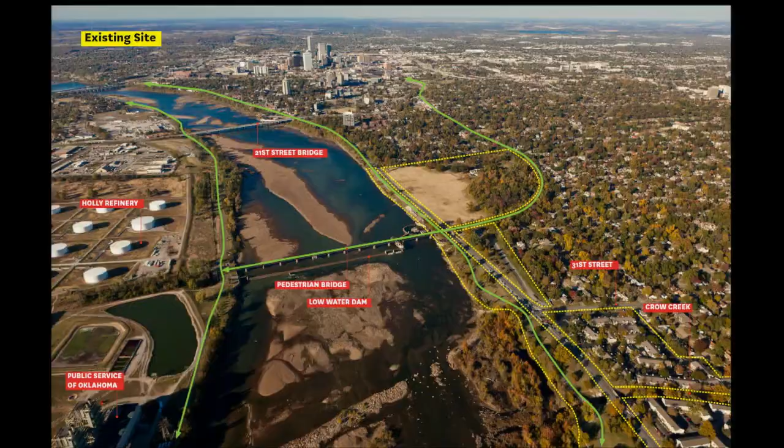But the site was made up of 4 different parcels divided by a major commuter route to downtown called Riverside Drive. Obviously, it had a lot going for it in terms of its presence on the river, but it also had these series of bike and pedestrian trails, which are noted in green. They run up and down both sides of the bank, and also connect straight through some of the neighborhoods and provide you access to downtown. So one of the biggest assets was how connected the site was to the adjacent neighborhoods.

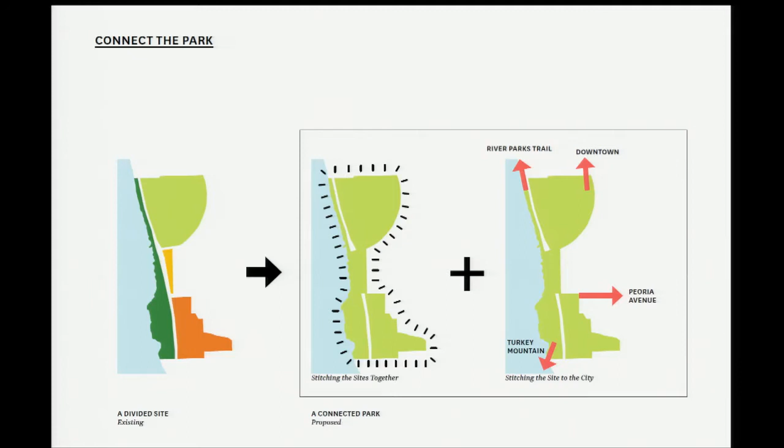So out of the competition phase, there were a couple of key components that came out of that, or a couple of main ideas. Obviously, with the ambitions of this foundation in creating some place for people to come together, you needed to match those ambitions with a much larger site than 4 different pieces. And so the main idea was really to try to connect these different parts and make it feel like it was a continuous park space, so that when you're moving from one space to the next, you didn't ever feel like you were leaving the site.

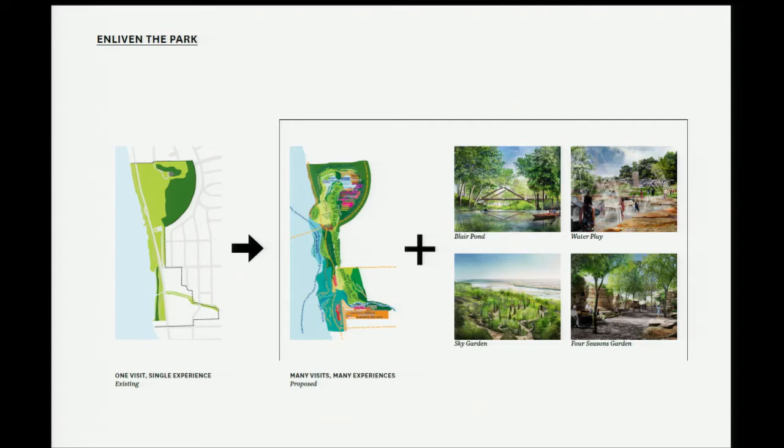The next one, Tulsa's a pretty comfortable place. Everybody has their own gardens, their own backyard space, a lot of generosity in terms of space and just a level of calmness. And so one of the things that became fairly obvious with visiting the city a few times, speaking with the client group and some stakeholders, was that this really needed to be something special to pull people out of their own backyards and get them actually wanting to spend time with their neighbor, right? Like, I don't know about other Midwestern cities, but they like their space, they like being alone. And this was a real effort to try to bring the community together.

We had a whole series of public engagement sessions to try to really understand if the key concepts that were developed during the master plan phase, where we actually didn't have the privilege to engage with the public, still held true. And so we had some meetings around different models. We went to different neighborhoods throughout the city, spoke one-on-one, set up a project website, and everybody was able to submit feedback that way. And we took all of that feedback and tried to categorize it into a series of larger categories, some related to program types, some related to existing site elements and some of the issues that were present then.

And then out of that came a series of design principles. So for the master plan, we'll focus on just the top 3, which is creating that level of diversity that I hit on, the variety of activities, and making sure that the site was connected both internally but also on a much more neighborhood scale.

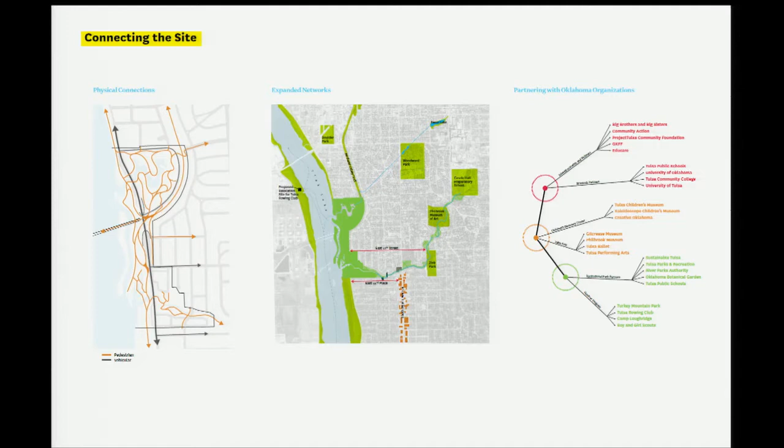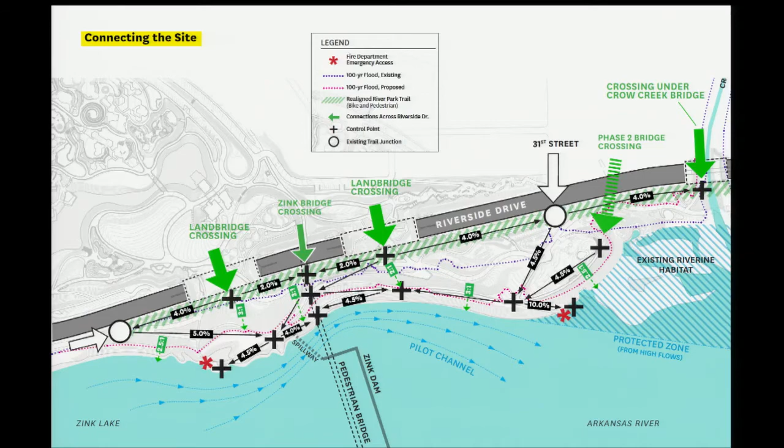So connecting the site. The whole site from north to south is almost a mile. It's about 4,800 feet. And so we knew that there needed to be a whole series of different types of connections, some over the roadway, some at grade that would connect back to the neighborhoods, and some actually under the roadway. And so in certain instances, we brought soil up and over the roadway, like this image.

These are two what we call land bridges, where the park space literally spills from one side of the park over into the waterfront. They're built on a whole precast concrete system, and then we custom made the ends so that it felt much more integrated into the land. This also shows how we provided some lower trails at the water's edge and helped that whole river's edge become much more accessible than it was.

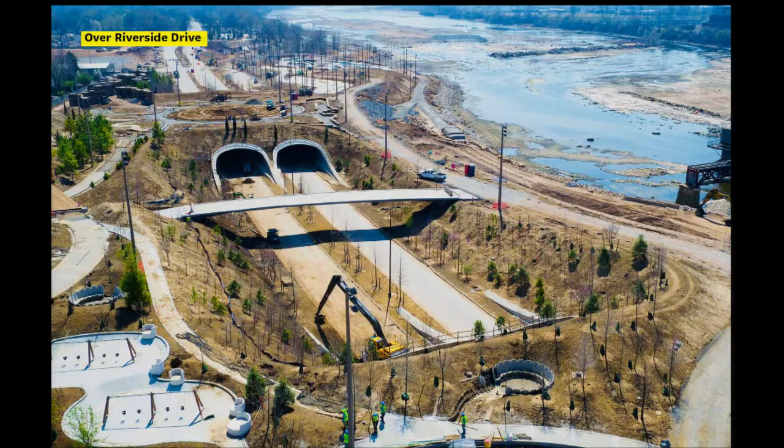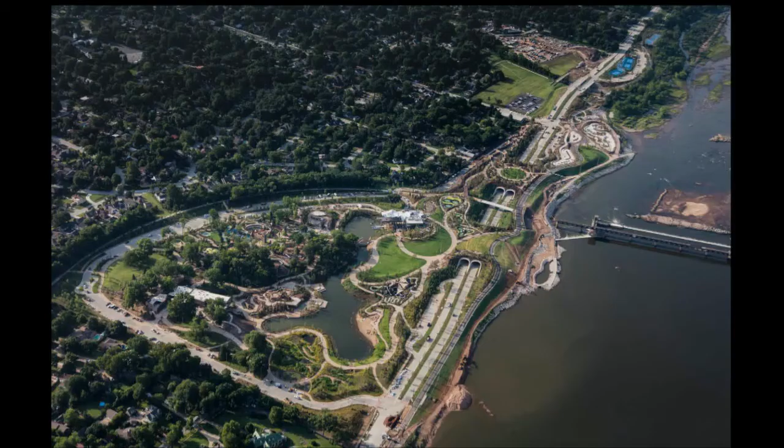When that was originally permitted with the Army Corps, the Parks Department was required to remove a certain amount of sediment on an annual basis, and they didn't have the budget over the last 10 plus years to do so, so it kept building up. So it just so happened that gradation of that material met our engineering requirements. So we basically took about 300,000 cubic yards out of the river, so we helped them with their maintenance issues and used that as the subgrade material to build the park.

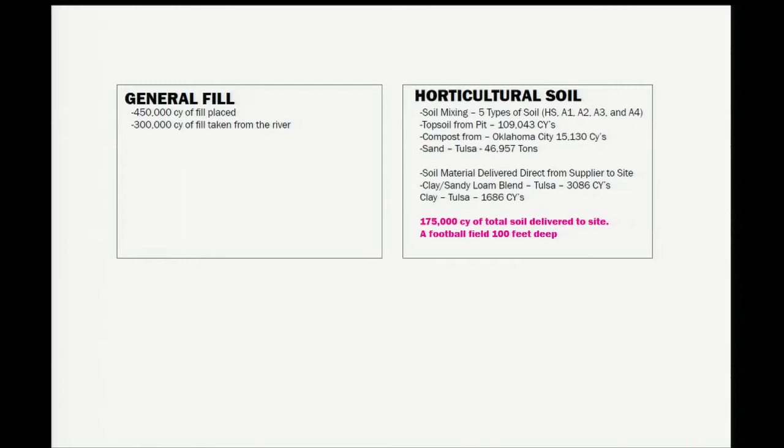Just kind of some fun facts that Matt put together in terms of not only the general fill, but what it took to make those different horticultural soil profiles. So to date, the park has received about 1.5 million visitors, and it's only been open since September. And so I think part of our job is to try to anticipate how that visitorship would impact the park and develop soil profiles that not only sustain that level of traffic, but also help support the vision of plant diversity and how things can sustain themselves without too much management.

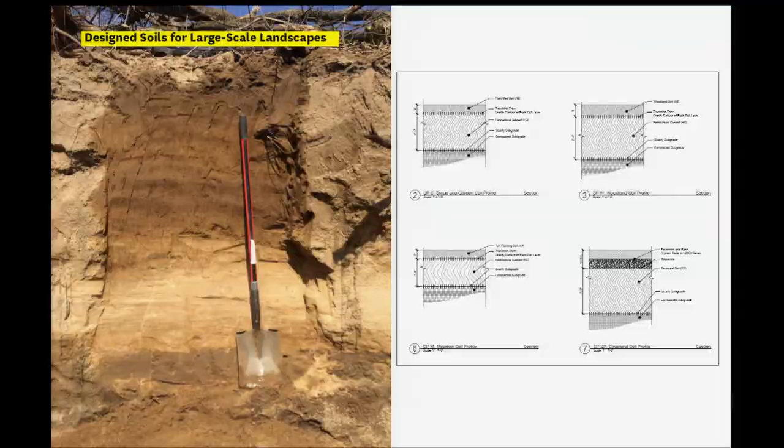Yeah, so if you look at the soil profile, one of our biggest components of our contract was the soil installation. About 25% of our total contract was soil installation. So we had to import about 200,000 cubic yards of soil for the job. And trying to do that with a consistent profile to meet our quality requirements was quite a challenge.

So this is just a good example. You're gonna see some pictures in a minute of where we mined the soil. But that top 3 foot is basically a sandy loam soil. We've got a couple feet of what we call sugar sand, and then we get into the clay. Well, we didn't want much of the clay, so once we hit the clay, we had to kind of stop digging and move to a different spot.

Well, the challenge is over thousands, millions of years, those soil profiles are different everywhere. So it was quite a challenge to get consistent soil requirements with the varying levels of soil profiles that we were digging through. So that was one of our biggest challenges. You'll see on the next page, we've got the mining operation.

So we had a 15-acre site off-site. It was about 20 minutes northwest of the site. And we were hoping we could just dig down 20 feet, pull all the soil together, combine it, mix it up, and send it to the site. Well, it didn't work like that.

The first kind of foot was all organics, lots of roots, lots of just stuff we didn't need at the job. So they hauled that off, sold it to somebody else. We took the next little bit, and as you can see, we're benching right there. We're mining about 6 foot over about 15 acres. And we did this over about a 1.5 to 2 year period of time.

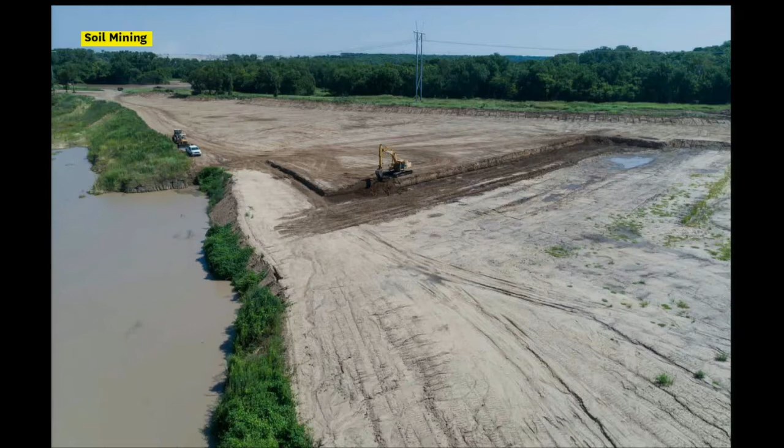But again, it varied. You can't really tell because our operator would come back and smooth it out, but it varied. Some spots we'd be 8 feet deep, some spots we'd be 3 foot deep. And it was all dependent on the soil that was brought in. This is our mixing yard. So the mining pit was just past those trees that way.

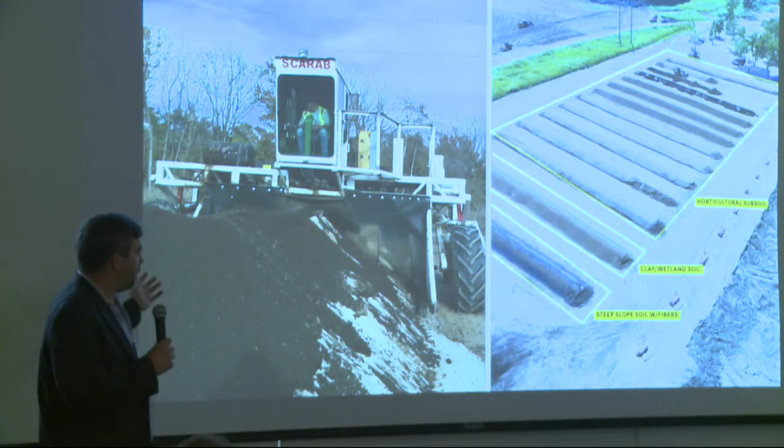This is a scarab. This is a big, gnarly looking machine. This is a compost turner, basically, is what it amounts to. And it has just huge tillers underneath there. And what we would do is, based on the soil requirements, we'd combine sand, sandy loam, a little bit of clay, add compost as we needed. We had 5 different soil mixes, either a 2-to-1 with kind of sand and compost, a 3-to-1, 4-to-1, just kind of depends on the areas.

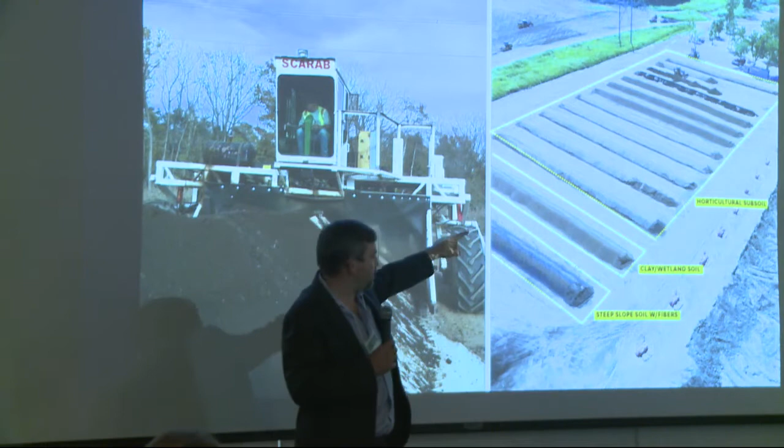But you can see the mixing yard. The horticultural subsoil, I think, was about 150,000 of our 180,000. That was the largest percentage of our soil. The clay wetland soil is a heavier clay. We used a special mix for that. And then on the steep slopes, we'll talk about slopes in just a second, but we put fibers in there.

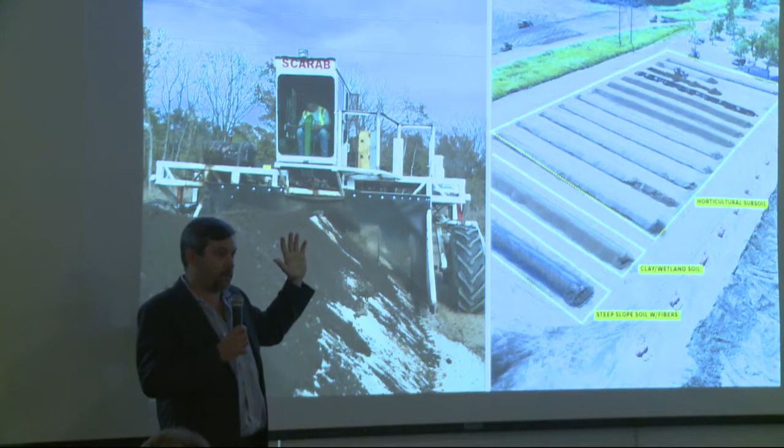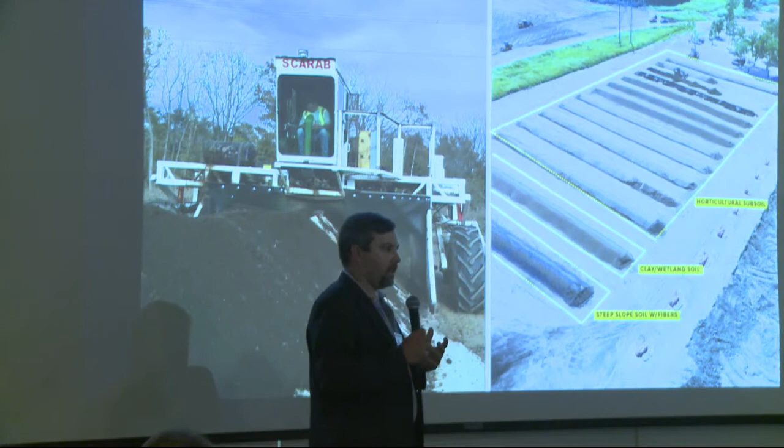This is probably a question half of y'all won't know, but does everybody here know what a cassette tape is? Yes? No? All right. Well, the fibers in the soil is basically, if you pulled all the roll out of the cassette tape, it's similar to that. And what it does is help hold the soil on the slope. So we'll look at some installation techniques we're using.

So each component, which was sandy loam, sand, clay, compost, and a few others, each got their own individual test, and we did rounds and rounds of testing to try to find the best sandy loam. We went south, we went all over Tulsa, and we were considering shipping it in from hours away to get the right kind. Finally found one that worked.

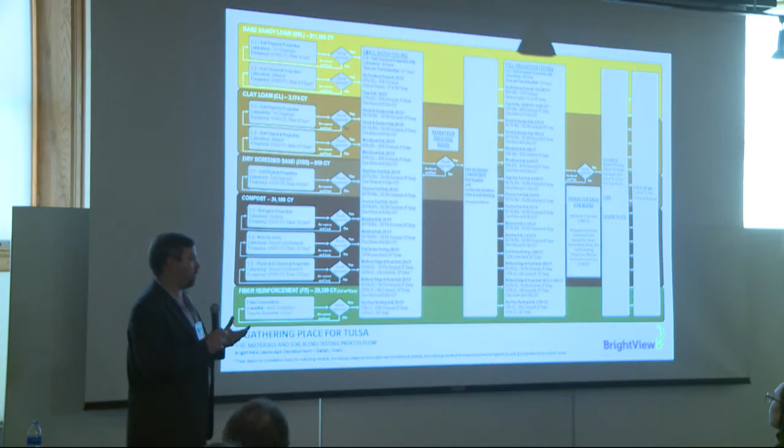Then we had to start combining those into the mixes that we needed to, and we had to do small batch testing. So the first small batch was 20 yards. We'd mix it up and test it, make sure we got it right. Then we'd move to 250 yards, and at the end of the job, we were just testing every 1,000 yards.

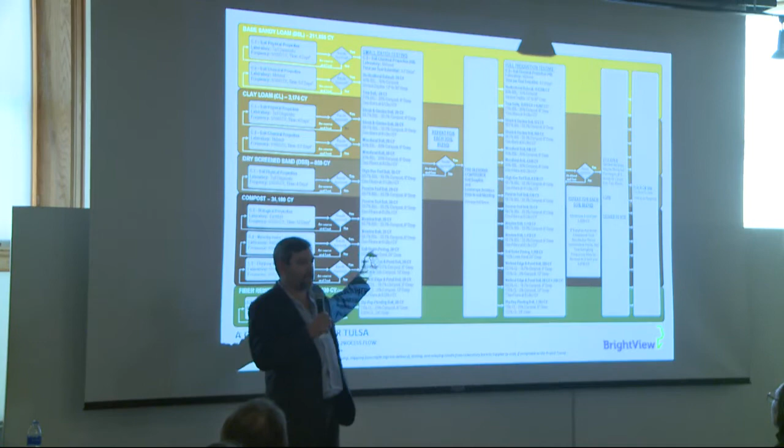But on 175,000 yards at multiple components, multiple tests, I mean, it was a lot of money to test the soil. And then we had to test it again when it got to the job just to make sure that we had stayed consistent with the product all the way through. So the soil was a huge piece and very important part of our project, and so we just wanted to make sure we got that right. We felt like as a team, if we don't get the base layer right, we're not going to get the rest of it right. So it was a big focus for us.

Next picture, this is the wetland areas, and we'll see some more pictures of this in a minute. But as you can see, there's some aggregate in there, and we're placing soil as we go. It's got some of the stone weirs and some different areas. So it was just a tricky installation.

And this was also the very first piece we did. So the wetlands were installed probably not quite 2 years, a year and a half ahead of the rest of the project, just because when you got this big of a project, you kind of got to go with what you can.

So you can see we laid down some filter fabric in some areas, just in the wetlands, and put some soil on top of that and plants. You'll see a little bit more of that in a minute.

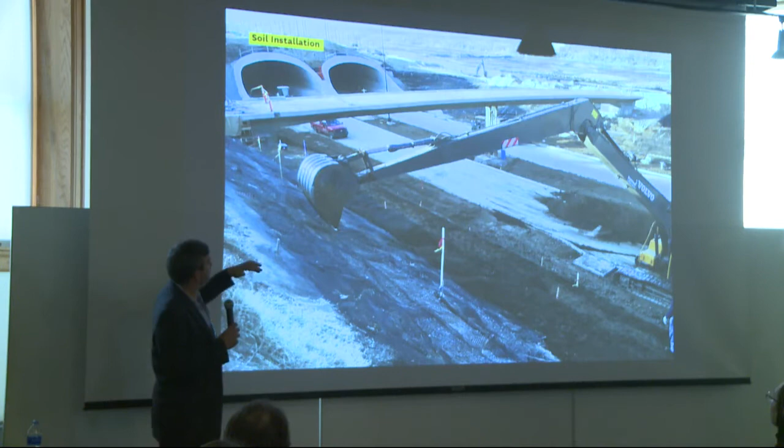But hands down, the trickiest part of the job was the fill you saw in blue on that previous page Chris showed. The fill was very tricky because of the slopes. You can't really get a gauge, but our guys had to sit on their butt and crab crawl down the slopes to make sure we didn't trip and fall. They were that steep. Aesthetically it looked great, but our challenge was how do we place that soil?

So we bought a $100,000 long reach excavator with about a 3/4 yard bucket. We had 175,000 yards total, and we didn't place all of it just with that machine, but we placed a lot of yardage with it. It was running nonstop.

If you look at the detail there, somebody brought up compaction earlier in a previous discussion. One issue is we could compact the heck out of it, but that's not what we want. We determined that per the specs, and we didn't drive any machines on any of the dirt. Or soil, we don't have dirt.

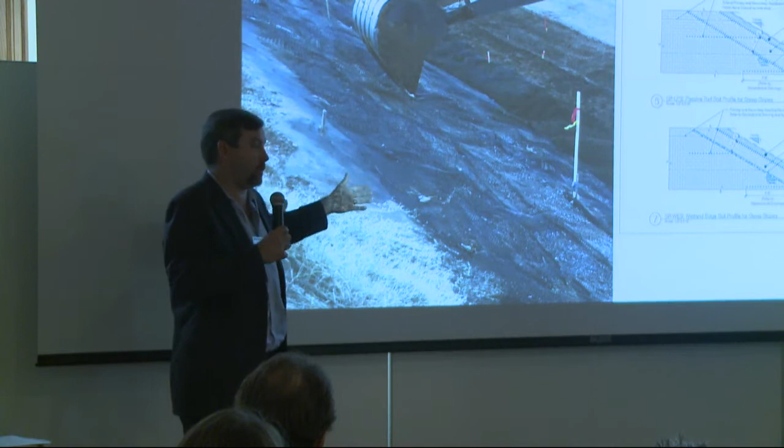So we didn't drive any machines on the soil, and that was a challenge in areas hard to get to. We had to work backwards out of a lot of areas. The challenge was how do you get the soil to stay without sliding down the hill, because we would have the soil placed for months sometimes before we actually got the shrubs, trees, or grass seed mixes held most of these slopes, which you'll see in a minute in some other pictures.

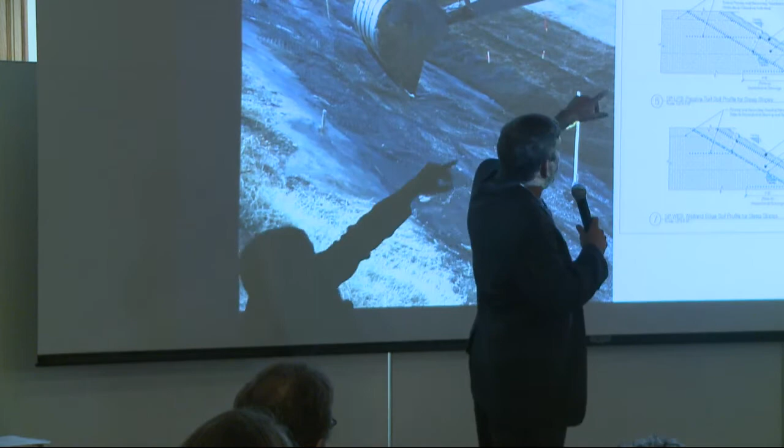But the geogrid layers are really what held it. If you look at the red lines, what we would do is place the soil, then the geogrid would be held up, and we'd lay the geogrid down on top of it, place another layer of soil going up the slope, and place the geogrid down on top of it again. So the geogrid had to go in layers, and that was a very slow, meticulous, tricky part of this process. Just the soil placement without compacting the slopes, and doing it safely, was very important.

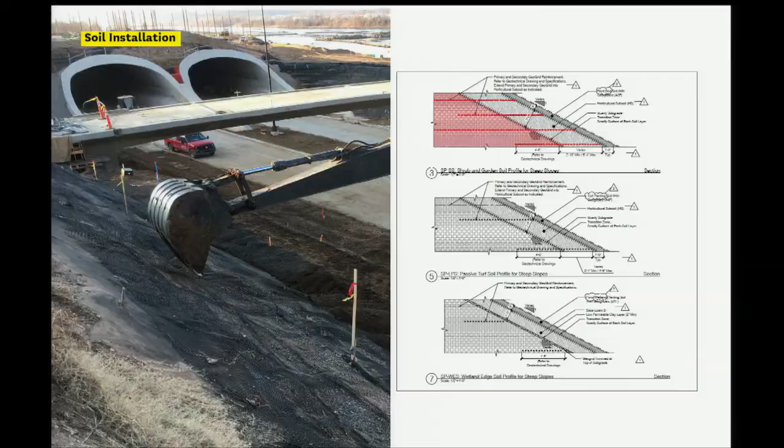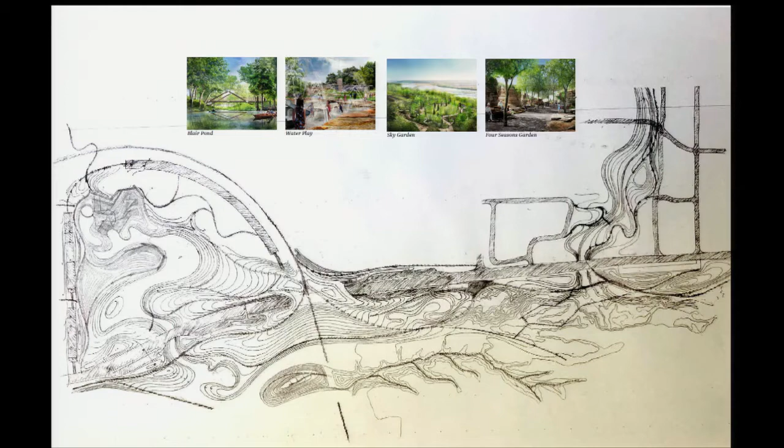One of the things I mentioned earlier was this idea of diversity of program, supported by all the public input. Honestly, with all of this wish list generated from the public input sessions, we could have used a site twice the size to accommodate everything. So it meant thinking about it differently and being a little more inventive about how to accommodate all of those different program pieces.

Obviously there was a tremendous amount of earthwork happening just to bring the land up and over the roadway. We carried that a little further in terms of how to accommodate so much program in a relatively small site. Most of that was done through topographic change, where you're really containing certain spaces, certain program elements that are next to each other but not necessarily complementary. That was a huge driver in the final form of the park.

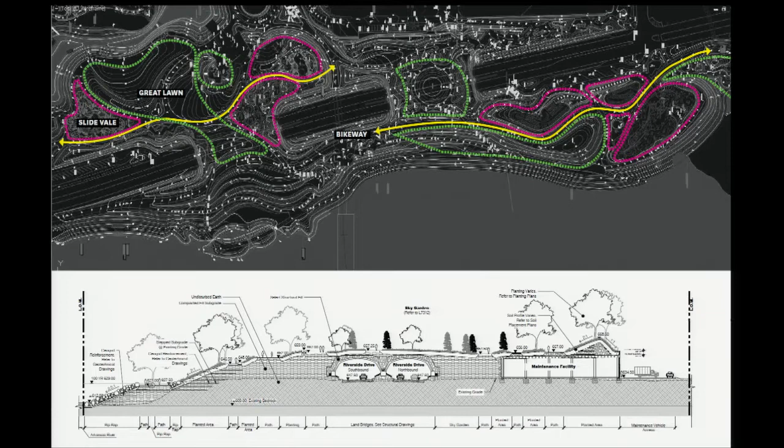This just shows two instances of that actually being carried out. On the left-hand side, there's a great lawn, the biggest lawn space in the park. You would think you'd want a quiet picnic space, but it's actually bounded by two playground spaces on either side. So you can imagine the level of noise coming out of those spaces when you're just trying to sit and relax and enjoy the view.

One of the strategies was to try to think about containing this, and in this instance, this whole space was sunken down. It helps not only visually, but acoustically. Honestly, this is about a 20-foot or so grade change, and 20 feet to a kid is just a mountain. So it doesn't take a lot, depending on who your audience is, for it to feel really impactful experientially.

And this is the great lawn next to it. The slide vale is actually just beyond this knoll here, and you can't see one from the other. So it's, I hope, successful.

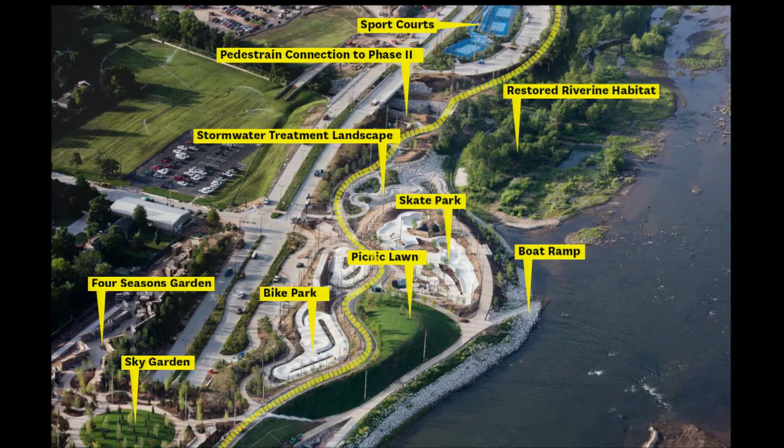I mentioned earlier that there's an existing bikeway that runs north-south through the park. We realigned that as part of this project, but one important thing was that this was such a heavily used trail—people go there after work to ride their bikes, go for a run—so it was our intent to preserve at least a little bit of that calmness and the views to the river.

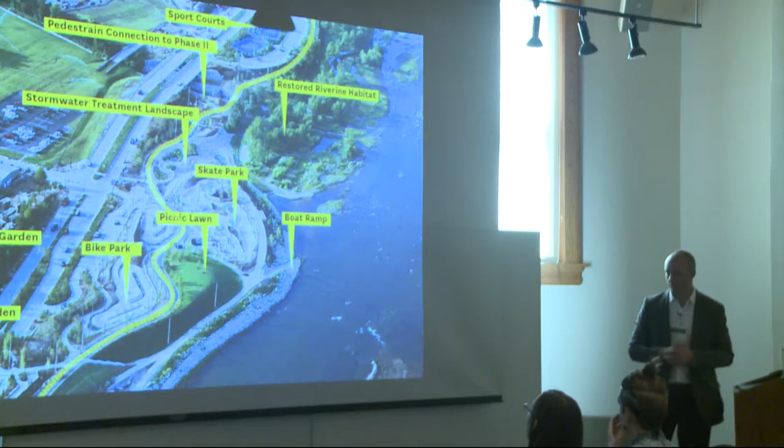Now you can see all the different program dotting alongside the path, but again, the same or similar strategy about trying to create some grade separation, whether through sunken spaces or raised berms, so you can actually experience it, you and the river, or you and a friend going for a run. These are the different types of spaces along that same route: the Sky Garden on the land bridge, the bike park, sport courts, stormwater management areas, and a mitigation area that we'll talk about in a bit.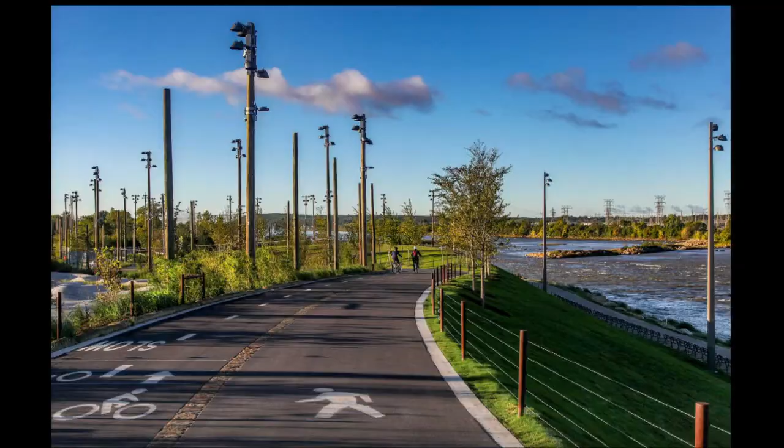This is just entering—you can see the bike park on the left. As those plants grow up, it will be almost completely screened, and it sort of reestablishes your relationship with the river.

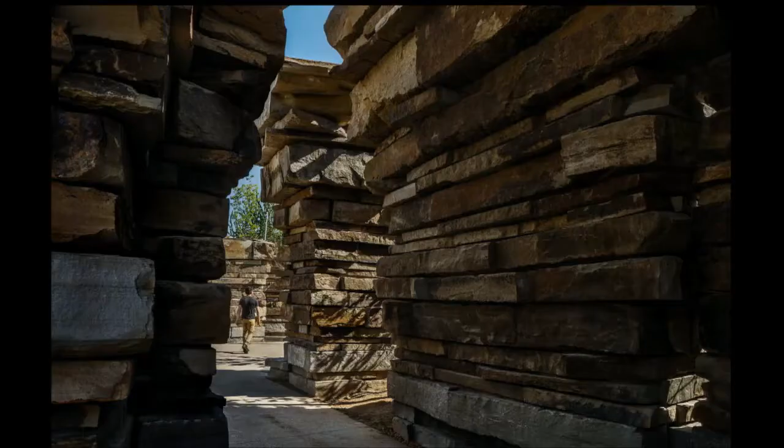Another big component is materials. If you remember that image of Chandler Park I showed earlier, it was a huge inspiration for this space in particular, known as the Four Seasons Garden—a name we came up with right before a public meeting, and once somebody starts calling it that, that's the end, even though there's nothing Four Seasons about it. Anyway, it was a fun process to take some of those inspirational places and figure out what the reinterpretation of that might be.

It started with visits to quarries, understanding their capacity not only for fabrication but to supply a job. There's something like 5,000 tons of stone just in this garden space, which is about 800 feet long. The idea is that the stone on the project isn't used in a typical way—it's used in a very unfamiliar, hopefully surprising way. It's not about ornamentation, but really about shaping spaces and your experience through the park.

So the slide hill that I showed you earlier is a means to get up to the top of the play space and also to stabilize the banks.

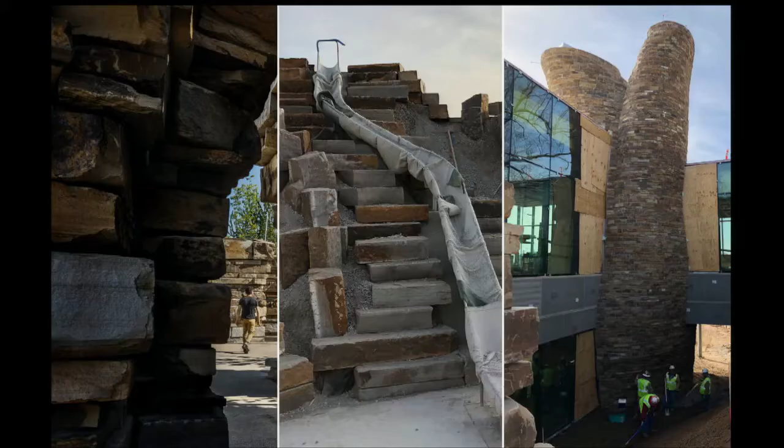This is a moment at the Lodge building. For those who don't know Mack Scogin and Merrill Elam's work, I'd recommend looking them up—they're possibly two of the best American architects alive, not to mention the sweetest people ever. People talk about wanting to integrate architecture and landscape, and I think they're a firm that really strives to do that, understanding how you move around and through a building, how you approach it, and what you're looking out from the building onto. They've been truly inspirational to work with.

Then you make your way out to the waterfront, and there are certain requirements you need to meet with the Army Corps of Engineers in terms of specified riprap sizes and materials that hold up to abrasion. But it shouldn't limit you in how that material gets used or the form it takes. This is a stormwater management area that takes some of the roadway runoff and filters it through a series of gardens and then out to the river—also the beginning of our mitigation area, which I'll talk about later.

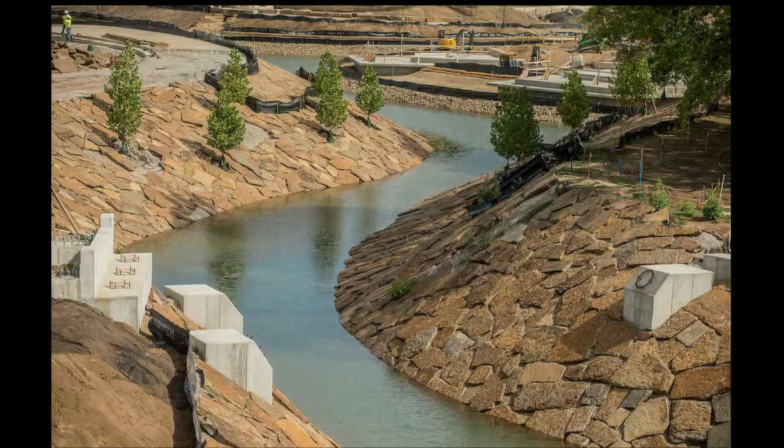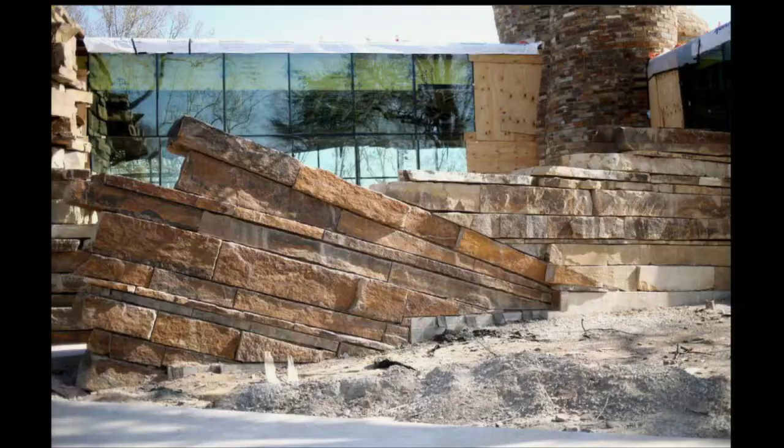Just more stone used to really shape your experience of the place. The pond water comes up quite a bit from here, but you can actually rent boats and canoes from the boathouse and paddle through, which is quite an experience. Going back to the use of stone in both the landscape and architecture, I think this is a good image representing a real integration of the two.

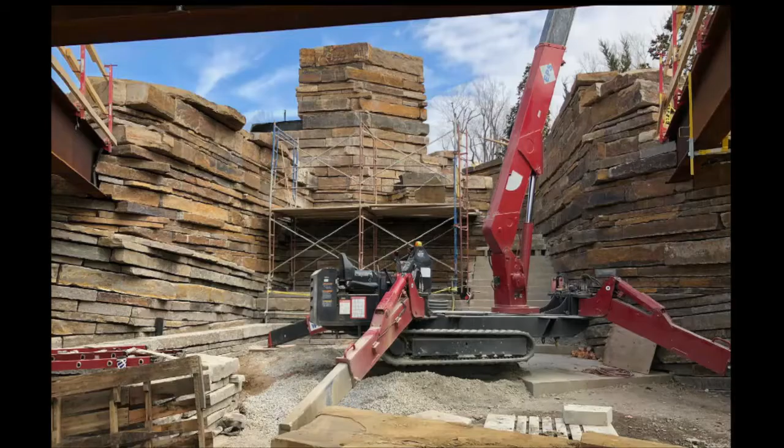And finally, one last stone image, just because this is one of my favorite spaces in the park. But again, this is not about stone as ornamentation, but stone as actually shaping your experience and feeling like you're carved down and in a space.

We actually built a lot of physical models and handed those to the contractor so that they could understand what we were looking for. The tendency with traditional masons is to try to do a really neat job, right? Align all the joints, align all the stone, and it sort of takes the life out of the walls and things. So we probably ripped portions of this down 4 and 5 times just to get those shadow lines and the break points on the corners, just to try to bring a little bit of life back to it.

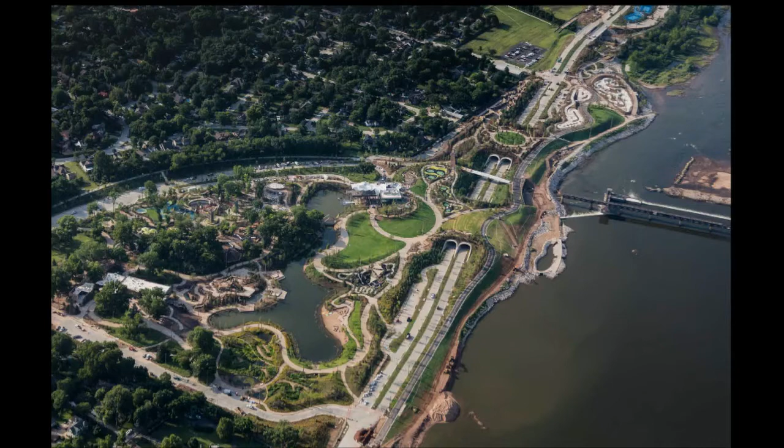As Mark mentioned, water is a huge component of many of our landscapes, and it was so at the gathering place. Not only the presence of the Arkansas River, but it served as a launching point for our strategy on how to deal with the Blair site, which is this one on the lower left.

So the initial concept was to try to create a much more inwardly focused landscape on that piece of land and have the waterfront landscape be much more about the waterfront. To do that, this is a quick before and after.

Because all of the different program was sited on the pond and fronting on that, we needed to make sure that it actually worked. Everybody was pretty skeptical of making ponds in that climate work, just because I think we're all used to the pea soup condition, and that's become a familiar one, honestly, through some of our past projects too.

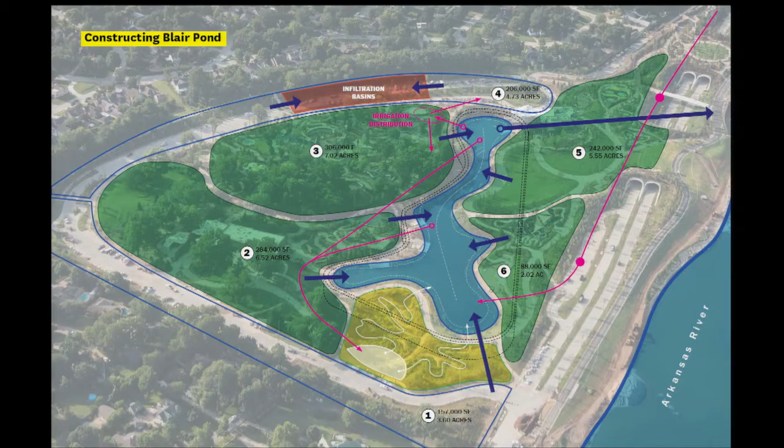So in order to understand that, we need to unpack all of the different variables and inputs that went into the design of the pond. So the first was to try to understand how the Arkansas River influenced the pond level.

This is a groundwater fed pond, and during different seasons, the groundwater levels could fluctuate as much as 4 and 5 feet. Now, because there was a requirement to have a safety shelf around the edge of the pond where it was accessible, so that as a kid you didn't step on the edge of the pond and immediately go down, there's about a 15-foot wide, much flatter sloped section. So we couldn't actually have the water fluctuate like that, right? All of those marginal plants would have dried up. So we needed to come up with a strategy to help control the pond levels.

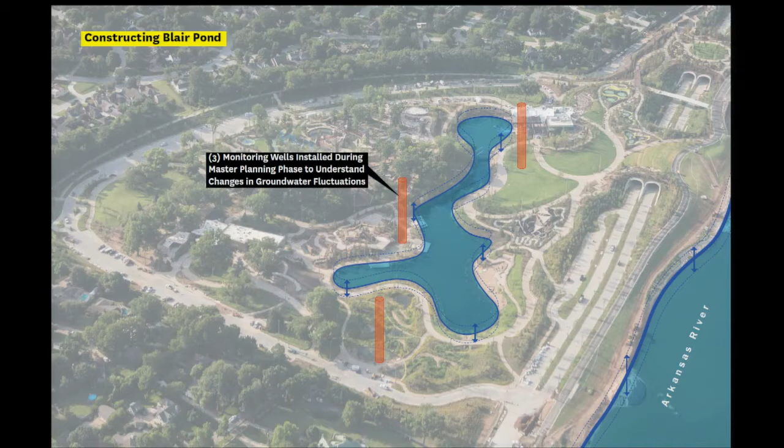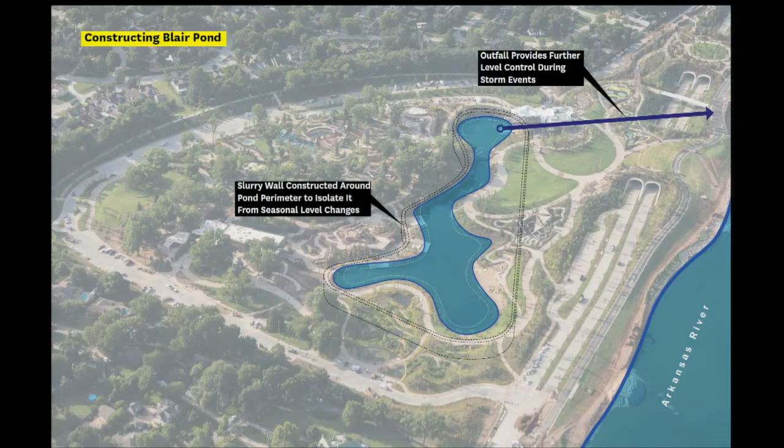So we actually created a slurry wall around the entire pond perimeter, and then excavated down to bedrock. And then later drilled a series of wells that pumped into the pond. There was a controlling outfall structure on the southern end, which then discharged to the river.

There were 2 main approaches for trying to treat some of the pond water. One was to obviously keep it moving. The second was to try to take that water and refilter it through a series of wetland channels at the top of the park. You can see the image just there on the left-hand side. There's about 1,200 feet or so of this wetland channel that helped with excess phosphorus uptake and those types of things.

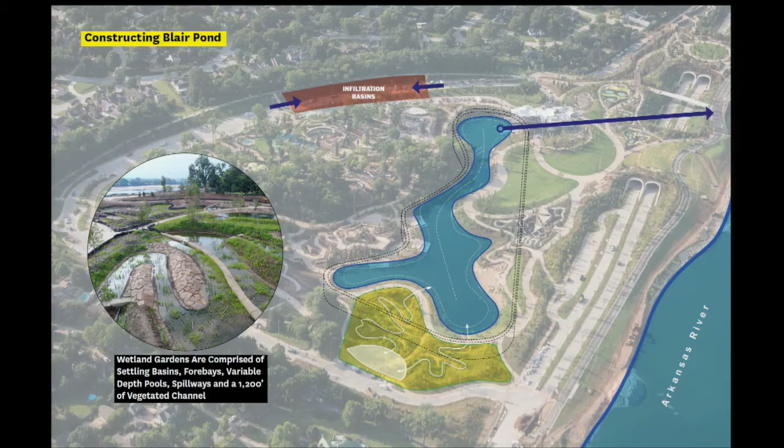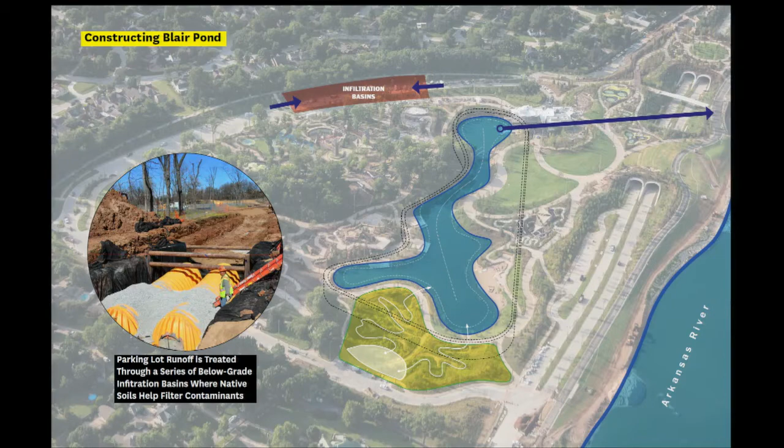The next was much of the parking lot runoff was collected and then discharged into a series of underground infiltration basins. So it's basically an open bottom chamber with a gravel layer below that, and sited in an area of the site with much sandier soils, to promote that groundwater infiltration.

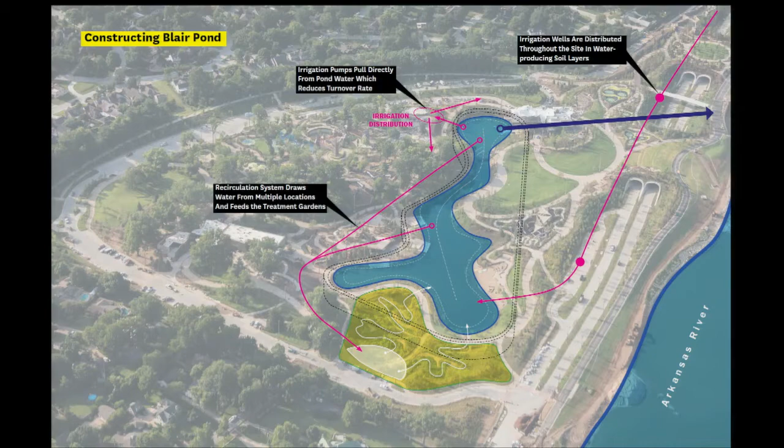And then, as I mentioned, we drilled these series of wells to feed the pond and also to feed the irrigation system. So the pump system pulls from the pond and redistributes that to the site. And then there's also another pump system that pulls from different points of the pond and recirculates that water through. So all of this is going towards increasing the turnover rate of the pond, so that the water is cooler, it's less full of phosphorus, and it's not stagnant.

Then river engagement. Just as important as the focus on the pond was this sort of reestablishment of your relationship along the river. Basically, there was an existing bluff with some hard elements along it, but you never actually had an opportunity to get down into this sort of landscape, not in an easy way. So this was all about trying to fix that condition.

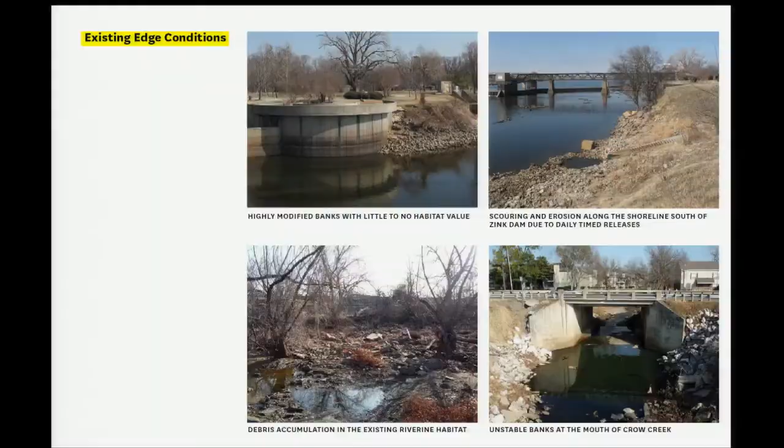So the Army Corps requires this very deep riprap level all the way up to the 100-year and past the 100-year flood elevation in certain instances. And so we basically carried that through and then put a sacrificial layer of soil on top so that you weren't basically walking through a riprap landscape. So again, we'll see what happens to this layer. It might become something that's much more of a wetland over time, but we'll see.

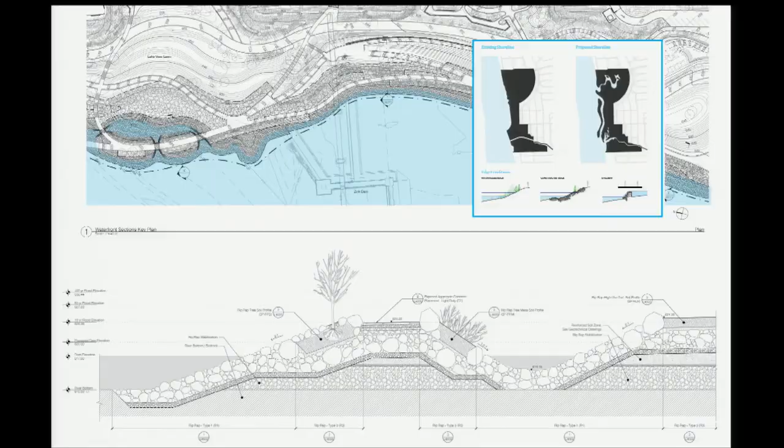The next is a mitigation area. When you do any filling into the river or waters of the U.S., you often have to do some mitigation to sort of offset your impact. And this actually created a huge opportunity for us. You could have paid a certain fine or credits for some mitigation work, but this actually allowed us to sort of complete the rehabilitation of the shoreline here. This is just on the south end of our site where Crow Creek comes in. The idea was to try to reestablish this historic side channel that is a little bit more sheltered from the high velocity flows of the Arkansas. So a different species thrives there, different habitat.

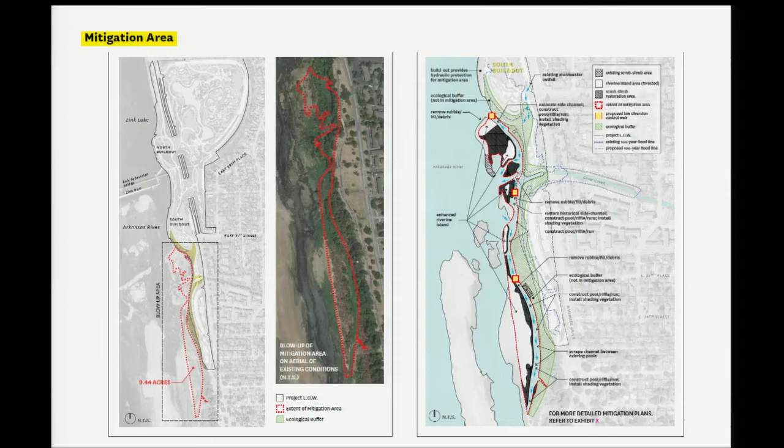Yep. For us on the construction side, this created a really unique challenge. Landscaping in a river is not something we do every day. And it was literally a jungle, just a solid mass of trees, vines. We had a lot of poison ivy. We sent 2 guys to the hospital for poison ivy treatment just because the poison ivy was so thick through there. It's not really a hiring requirement when you ask somebody, are you allergic to poison ivy? Yes, you can't work here. No, you can work here. But we had to go through that process to figure out who was and wasn't allergic to poison ivy so they could work on the mitigation areas.

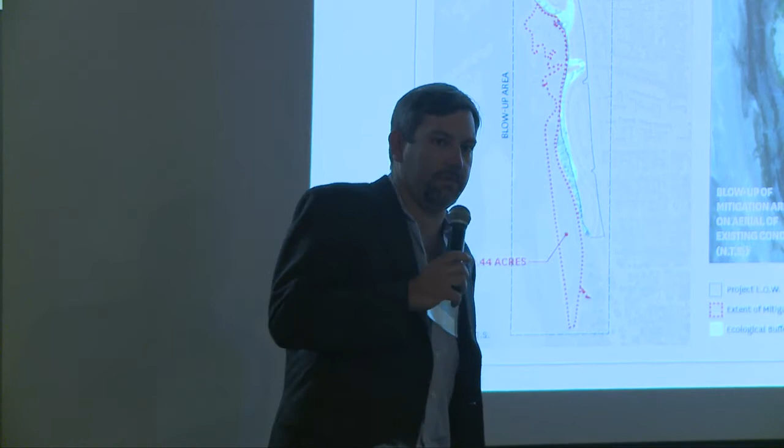Second big challenge: we try to pre-task plan. We try to figure out everything that could possibly go wrong within a site and try to mitigate that on the front end. And one thing we didn't account for on this one was beavers. Beavers were really a challenge. We had steel baskets. We had 250 trees, so we went through, cleaned it up. We spent almost a year just weeding, pulling vines, because it just kept trying to come back, and it was a full-time job. But we planted 250 trees in here, and the beavers were wiping them out as quick as we could plant them.

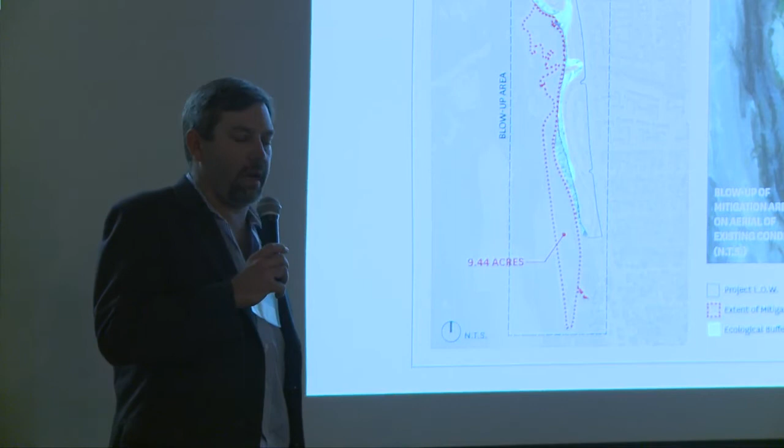And a little side story, if you look at Crow Creek, it goes up a couple hundred yards past this page. We had a tree nursery up there, and we had about 1,000 trees that we were moving from the tree nursery to the site. And we paid a beaver eradicator many times to come to our tree nursery and pull beavers out, because you can't remove them yourself. So anyway, it was an interesting challenge for this area.

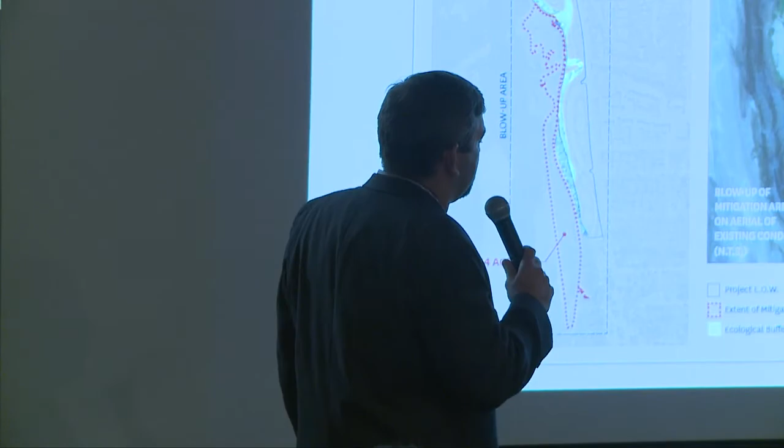This is the mitigation area after we've pulled the vines out and started planting trees. You can see some of the trees going in the background, but again, just creating a natural look for the water to flow through there. It was not just on the river; it gives it a kind of a side channel. So we cleaned a lot of this up. You can see there's a lot of native weeds and grasses still trying to come in there.

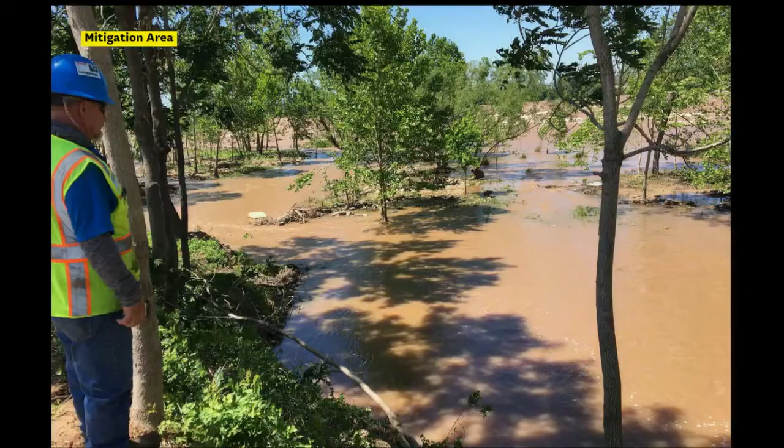Flipping to the next page, one of the other challenges is as they release water through the dam, one day we'd be working in an area, it'd be dry as a bone, the next day it'd be 6 foot of water and there'd be no rain event, no anything. They just released water from up above and it came down.

So many times trees laid over, we lost some trees, it just became one of those things. We had our guys wearing life jackets if they were near the water, just in case they released water. Just a set of challenges that you don't typically think about in the normal landscape installation.

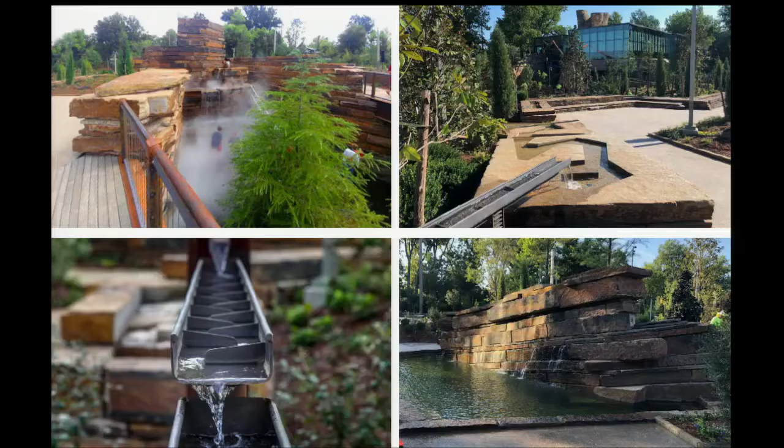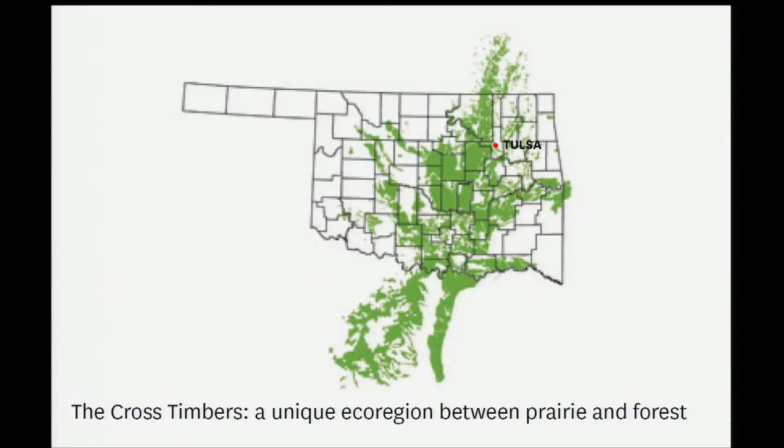The next thing is really about horticulture, and honestly, with any of these elements, we could have spent an entire lecture on them. So there's not a whole lot of detail in this section. But if you guys have questions after the fact, please hunt me down and we can talk about it a little bit more. Tulsa's in this really interesting in-between of the prairie landscape and a forest one.

It's known as the Cross Timbers for those of you that know. And so these are two drastically different landscapes, which are actually quite familiar to most people in town. They're all within driving distance, and I think experienced in some way or another. You get both of these types within Tulsa proper as well. So this was an overlay on the park as a backdrop for the planting approach, while the more programmed spaces had their own horticultural intent.

I can't not mention that gardening and horticulture is a huge part of Tulsa's culture. They have all of their museum landscapes, their teaching gardens. There's a lot of community outreach and education about plants and gardening and nature, and so that infused this idea into these different spaces of the park. And so the intent was really that the horticulture should support the program of the space, whether it's a play space, an outdoor dining area, an open lawn space, a passive rec space.

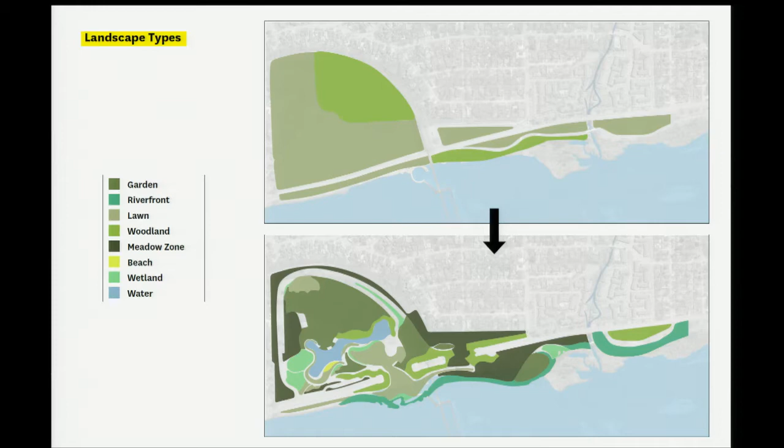But going back to this idea of variety of experience, I think it was really important that this transformed from something that was a large open lawn space with a managed woodland into something that was much more complex experientially. And de facto, by all of the grading that we had done to try to solve some of the connection issues, it created a whole series of different microclimates and different solar aspects. So it allowed a lot of different plantings to survive.

And honestly, we're still learning on site how this is impacting certain species, and things that we thought would grow in a certain instance are not, and certain things that we didn't think would are thriving. And that will certainly change over time.

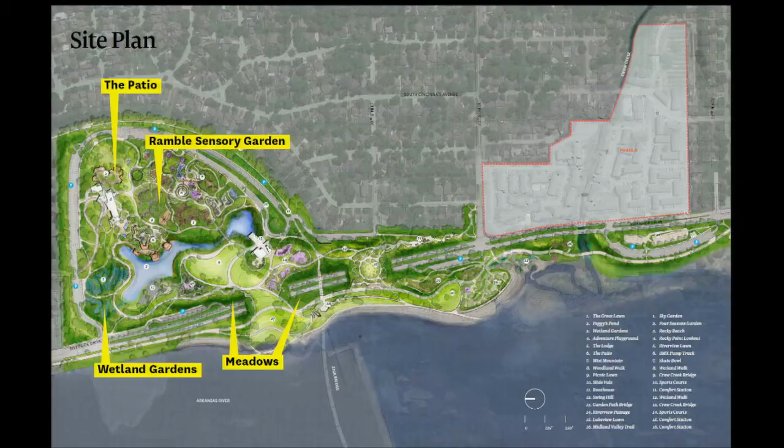So we'll just touch on 4 spaces to wrap up here. The first is one of the playground areas. This area of the park is a 7-acre playground, and we'll start on this one on the left here. So there are some overarching themes throughout the playground.

Also, you'll notice some of the existing trees here. The whole playground was purposefully set below the existing woodland to try to provide at least some level of immediate shade. And in other areas where large collections of elms happened is where we sited buildings or large equipment that required a larger footprint. So it was analyzing the existing condition and siting program elements based on the different tree types that were there and the health of them.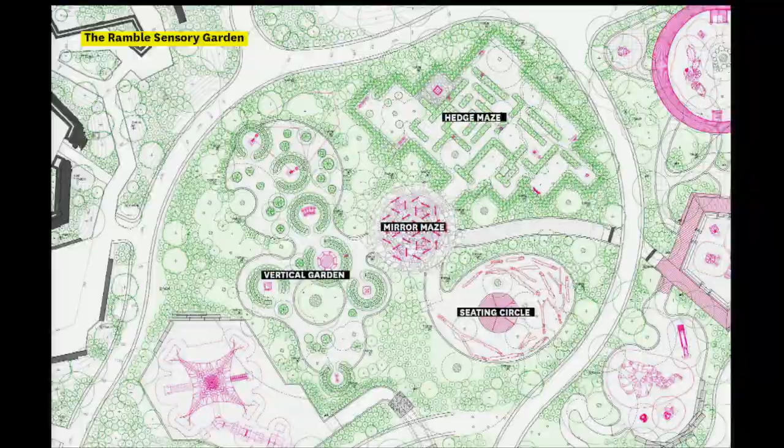So this is the Ramble space. It's called the Ramble Sensory Garden. All these different pink dots in here are different play features. So there are these connected microphones that you can talk to your friend in some other space in the hedge maze.

There are these turning stones, there are these wind chimes, there's this German equipment manufacturer that we've worked with on several other projects. The name of the company is Richter. Some of you may have heard about them, but they are just fantastic, top-notch play equipment manufacturers. They're much more than just making play equipment. They understand kids and challenges and kids and nature, and again, they pushed the envelope on some of this stuff and helped us develop the plan.

So this is one of the moments in the vertical garden, these hornbeam rooms or hedges, but again, the idea is that the plants themselves are part of the play experience. They're not on the periphery, but they're really part of something that you move around and feel a part of.

This was an area where there were several trees in poor condition, so the intent was to try to create a void within the existing woodland, all while preserving some of the healthier trees. For the ones that were not as healthy, we actually cut a lot of those down, and depending on the wood species, we would reuse them as some of the seating throughout the playground.

And here's that hedge maze. You can see these little telephones popping up in the maze. And this took a lot of coordination with the Brightview team too, to try to make adjustments on the fly when different root conditions were encountered. And it wasn't perfect, but I think through a dialogue we got there.

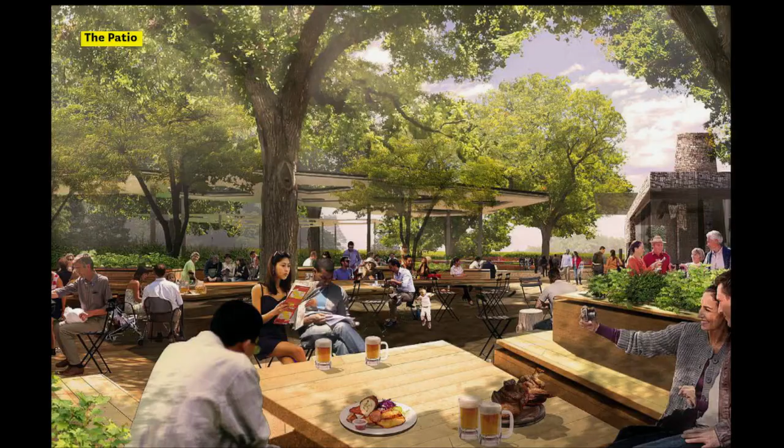The next is spaces, the patio. One of the comments that came back in the public engagement session was this idea that Tulsans love eating outdoors. A lot of their downtown spaces are centered on this, and it's one of the few things that I think brings them together. So there's a couple of these moments in the park. This one was actually sited below a mature oak canopy. These were 80-foot tall oaks or something like that.

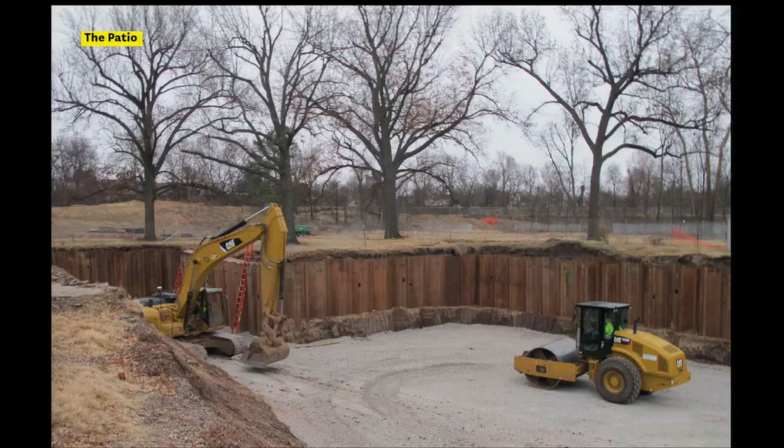So it was really important to try to understand how the proposed improvements would impact them. Here they're excavating for the lodge foundation. In this next slide, the intent was to provide access below the canopy without impacting the canopy with foot traffic and soil compaction and those sorts of things.

So we developed this deck system that is sited on a whole field of micropiles. Micropiles are very small. They have an 8-inch diameter in this instance, but very low impact. Even the rig equipment used to drill them is very low impact. This micropile field was laid out, and each one was air spaded to understand the different root locations, and some were shifted depending on that.

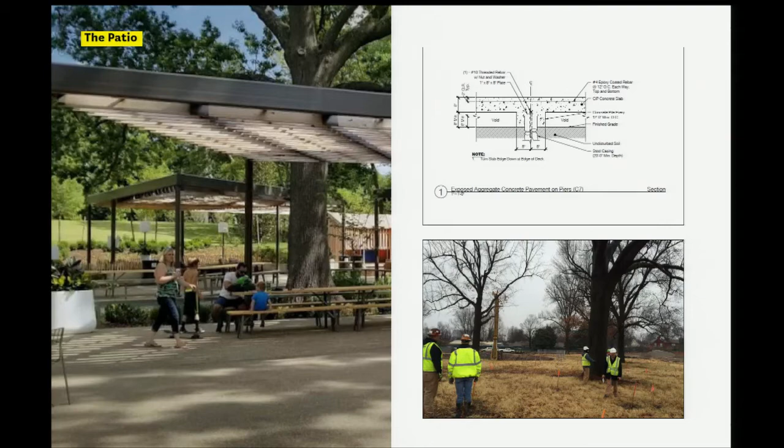It basically allowed this slab to be poured on top, and all of the water and circulation that would happen naturally just continue to happen. Those voids that you see in the detail there were cardboard forms. So the pour had something to rest on, and then they disintegrated over time and left the void space. Kind of a fun fact. And so this is the patio, or the beer garden as it's known.

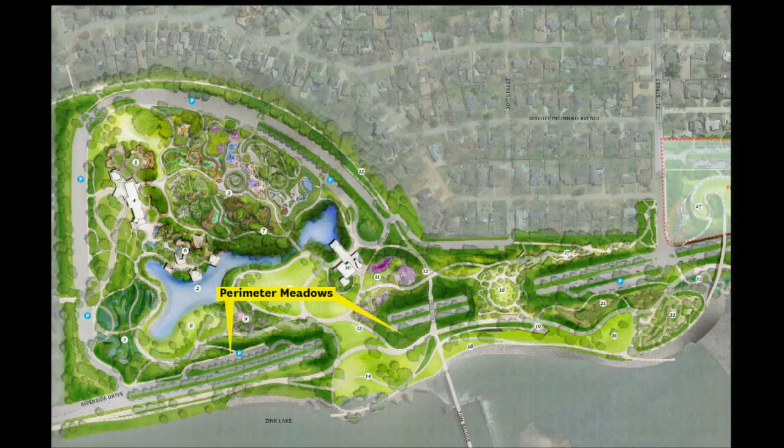And then finally, I mentioned earlier the idea of this cross timbers landscape being the overlay over all of the larger non-programmed spaces. So we did a series of meadow mock-ups very early on with Matt and his team to understand how that whole sequence would work. I think it was useful in some ways and maybe not so useful in others. One of the challenges with this site is obviously the steep slopes that were created. So we tried to anticipate that a little bit.

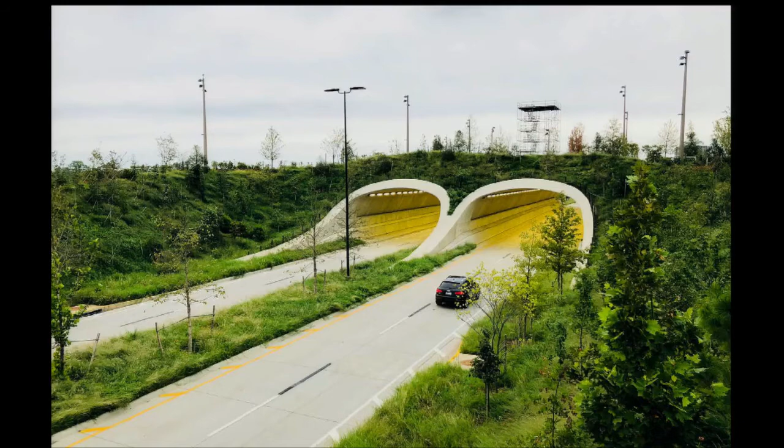To wrap up, just wanted to go through some numbers. We do a lot of landscape. I've been with Brightview for going on 17 years now. We've planted a lot of trees, done a lot of shrubs. We delivered over 600,000 shrubs to this job site.

Between plugs and shrubs, you can see some of the numbers. Just bamboo, we delivered 27,000 bamboo to the job site. Holy cow, I hadn't planted that much in my entire career probably. It was a lot. Trees, we planted 6,500 trees, about 112 to 115 different varieties.

We've talked a lot about this in other conversations today, but I think what MVVA did on their tree design was really unique. Obviously, 6,500 trees on 66 acres, that's not going to be there 10 years from now. Basically, they created a site for natural selection to take over, and it also creates a unique environment of change.

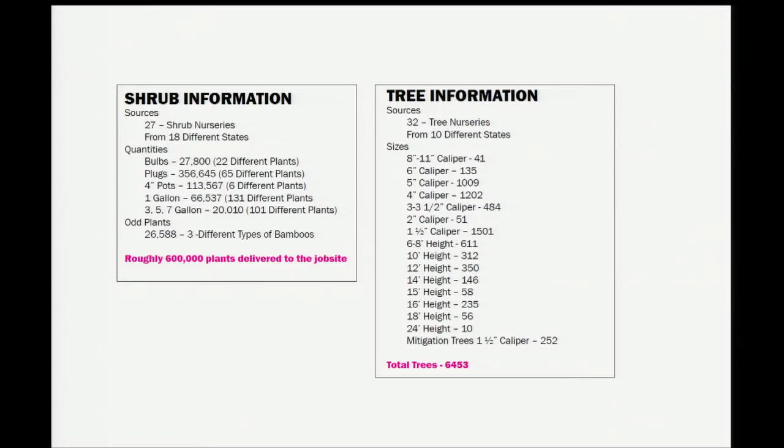So you can go to the park year over year, and there are areas where we have full sun meadow mixes that, as the trees grow, they're going to shade out some of the meadow mixes. The mixes are going to change, and of the 6,500 trees, some are going to outperform others.

We've got a 2-year warranty on it, so I guess they're good. All trees will perform for 2 years. You're screwed. And then after that, but again, it's natural selection. It gives it a chance to change, and there's going to be some trees that grow fast, some that grow slow.

But with 113 different varieties, it was very challenging. It took us over a year of just procurement and tagging of trees and shrubs and photos, and we had two full-time people doing tree and shrub procurement for over a year. But it was just a lot of really cool plants delivered to the job, and just the quantities were unreal.

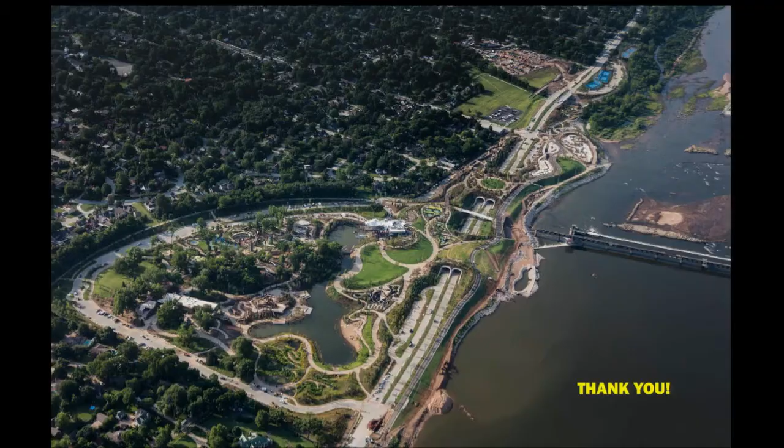That's it. Thank you all. Any questions?

$500 million. You had to bring it up, huh? No. And you spent every cent. Yeah, I mean, the construction costs for this were about 220.

So a lot of it is in land acquisition, and not all of which is in this phase either. There are some land purchases that extend to the south and further east that are also wrapped up in that. There's also a significant city contribution.

So basically, when an undertaking like this happens, you try to tease out what other projects or engineering improvements the city has lined up for the next 2 to 5 years, to try to pair up those efforts. They basically fast-tracked a couple of projects they had on the books to sync these up, to make it more efficient so they weren't coming back later digging up finished streets and rights of way. So between the city contributions, land acquisition, and construction costs, that was the total.

And the majority of it was donated. George Kaiser donated over half of that. He's a billionaire, he can kind of spend his money how he wants. I'm glad he did it. For the city of Tulsa, this is amazing. It has absolutely transformed the city. You don't think of Tulsa as a destination place, but this is absolutely a destination spot because of this park.

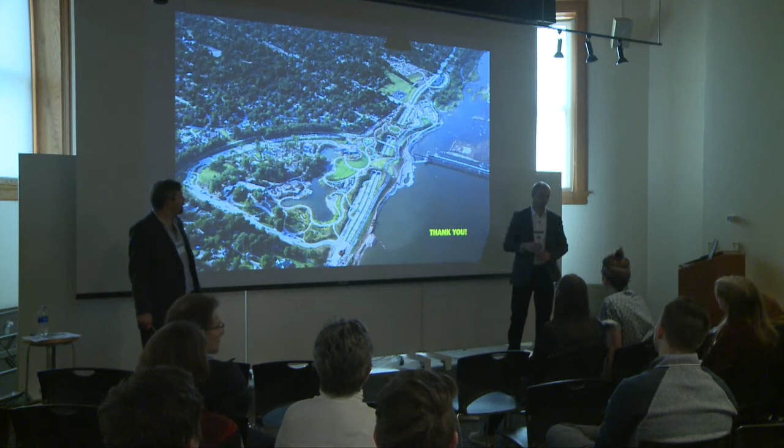This is the Four Seasons Garden. You touch down on the roadway at grade level and rise up about 20 feet higher than the beginning of the path. That whole stone garden is all about containment, moving between these different stone outcrops, shielding your view from the roadway and giving some privacy to the neighbors. So it was basically the opposite of that experience - as you emerge from that walled-in landscape, you pop out into one of the high points of the site, and it was all about just a lawn space in the sky.

Even the planting there is narrow junipers and ginkgo trees, so it's not a heavy shaded canopy. It's very light, quite architectural but light. And on the perimeter there's a really heavy herbaceous layer throughout, and there are benches on the sides of these circuitous paths, so if you don't like being out in an open space, you can tuck back into the garden and look out onto the lawn.

Can you indicate your vehicular circulation and how much parking you had around the perimeter? Sure, yeah.

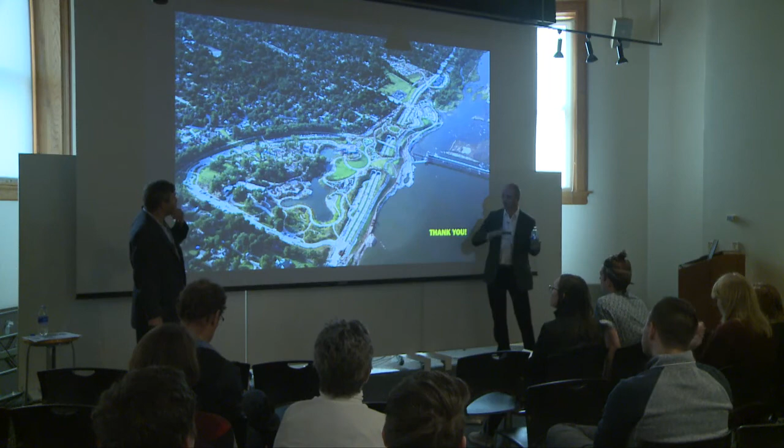One of the things that became apparent in the early stages of the competition was this theme of the ease of the city, like everything is very easy to get to and travel through. The last thing we wanted to do was introduce a parking structure, that whole sequence of driving in, parking, and exiting is just odd. So I think the two ideas that won us the competition were the land bridge and the parking strategy.

So this whole road loops around an existing tree and comes back, with parking spaces along the entire length. There are satellite lots that let you plug in closer to where you want to be if you're more familiar with the park. There's a large parking lot on the south end by the ball courts, and another satellite lot by the skate park. All in total, I think there were 540 spaces.

Right now they're using the Phase 2 site, they've paved the whole thing because of the amount of visitorship they've received so far. They just haven't been able to accommodate all the parking.